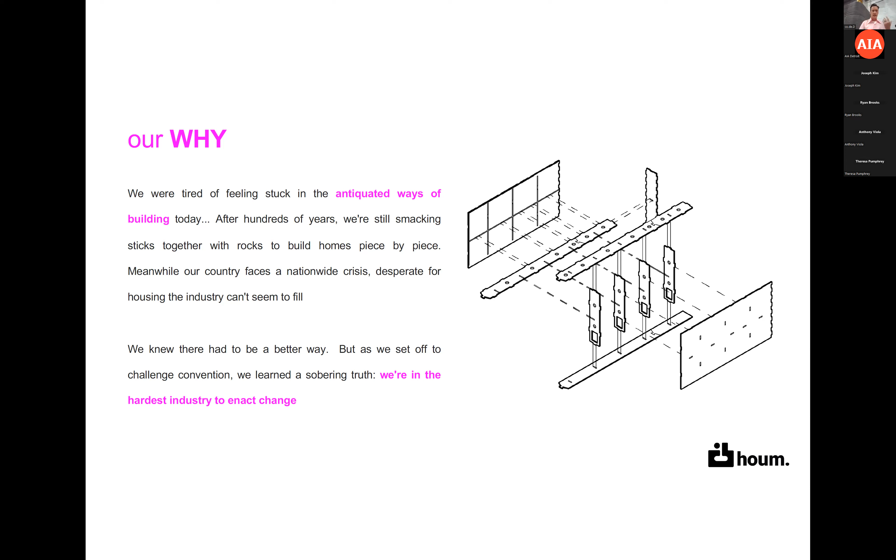I don't have the source to back that up, but I will say it's damned hard to change. And however you want to couch it, from skeptical contractors to risk-averse funders and banks to clients or tradespeople.

Who are operating on very tight budgets, don't have the kind of largesse to be able to suddenly take this flyer. All sorts of constraints.

And so years and years of trial and error, some of me working as a faculty member, doing research, doing prototypes, some of me working with Breck and our friends at 3 Squared, doing prototypes and taking on projects, paper projects.

We found what we believe to be a more scalable way. I'll let you know in about 9 months when our first project is complete, whether indeed it is, or I'll be up here in tears and you can console me and that'll be fine. We're taking this risk together. But our goal is to build smarter, greener, and more affordably.

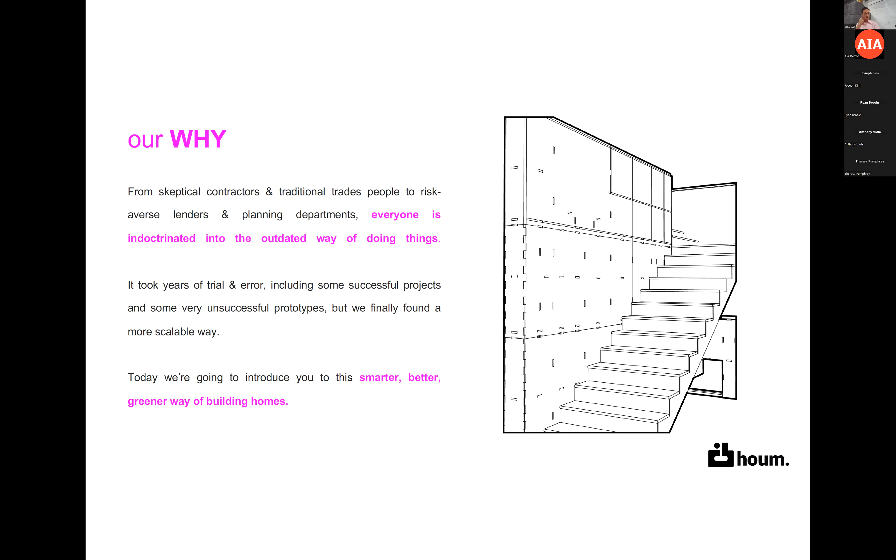So what we're looking at right now, and I'll explain the rationale for this in a second, is trying to harvest the intelligence and efficiency within industrial manufacturing, marry that with the promise of generative design, which we've already spoken a little bit about, and then marry that with the precision manifest in digital fabrication.

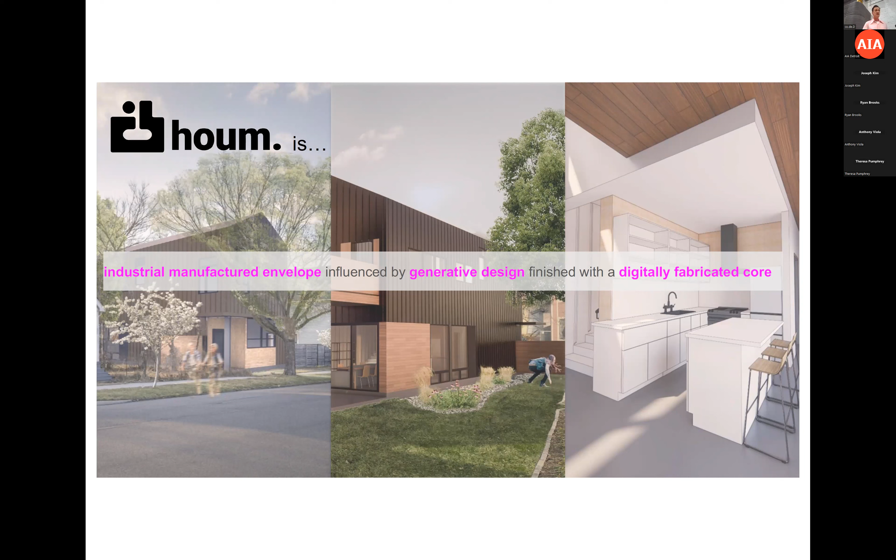Now, why industrial manufacturing is the first part. I wasn't interested in setting up a center or a lab where I was the architect and also happened to be the fabricator, the builder, the contractor, and the client, right? I was much more interested in just being an architect, and then finding ways to have people who fabricate and people who build do what they normally do, but in a way that disrupts the traditional patterns of the industry.

And so we started to look at other places where there's incredible efficiency and precision at a very large scale. Where does that exist within the building industry, right? There's a lot of different answers to that question.

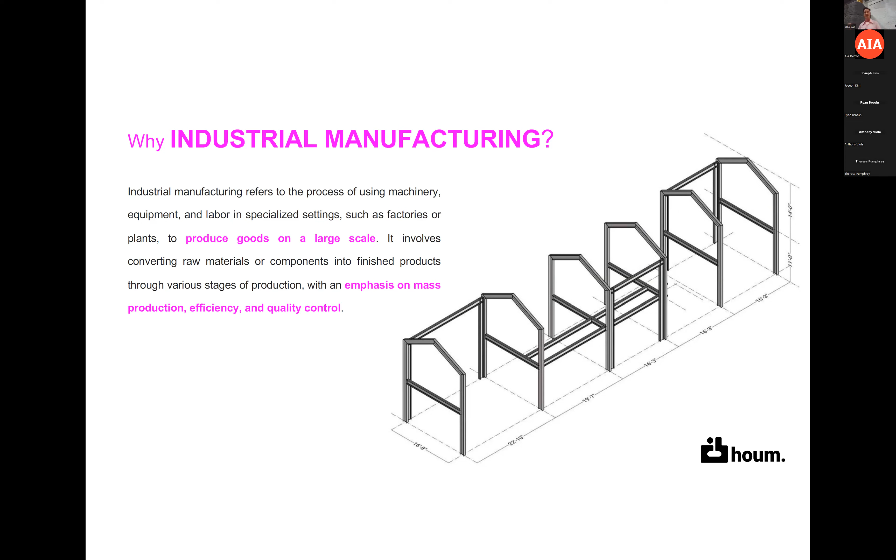I think not too many years down the road, the answer could be right behind me. Right now, where we are in terms of price point, some examples would be pre-engineered metal buildings. Another example would be SIP. Another example would be mass engineered timber.

I am fetishistically fascinated with those garages that you can order online for like $5,000. They blow my mind. They're cheap as all get out, and they make me vomit a little bit in my mouth. But if there's a way that we can harness that incredible precision and efficiency, and find a way to embed some greater intelligence in that, I think we'd get somewhere.

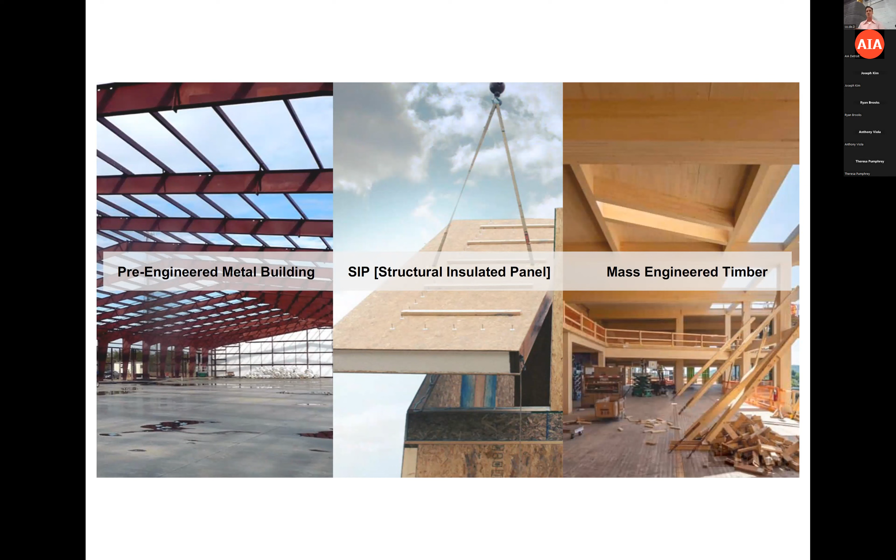On a per square foot basis, it's really hard to beat pre-engineered metal building in terms of just cladding a space and covering that space. Now, the problem obviously is that these forms of construction are sometimes very poorly detailed, sometimes massively out of scale, oftentimes really out of context within a residential neighborhood, and actually aren't incredibly kind to humans who want to live within them. So how do we deal with that?

Well, before we get there, the other thing is they're very much aligned with a distinct context. They operate well because it's a turn the crank sort of proposition. Keep doing it again and again and again. And you get smarter and faster and cheaper, smarter and faster and cheaper. That's how they got to be where they are, right?

So is there a way then that we can use generative design to begin to import greater intelligence to that envelope? And can we do it in such a way where we're not bloating the timeline or bloating the cost?

Now, I bring that up because there's a reason architects currently only design 2% of the houses in the United States: we're a luxury item. And we operate based on a patronage-based practice. Like we started designing for popes, and now we design for corporations. And we're very good at that.

But when you try to take that same exact set of tactics and apply them to a very different constituency, you can get into trouble, right? And so that's the reason 98% of the houses in this country are not touched by architects, even though we have a lot to offer that conversation.

We're expensive. So is there a way that generative technology can embed a little bit of the intelligence that we bring to every project into the specific context in which we're operating, without us completely remaining absent from it? Can it substitute for a portion of us so that we can infuse a little extra of us at the end and still allow the project to meet its cost and timeline obligations? That's the question we're trying to ask and answer.

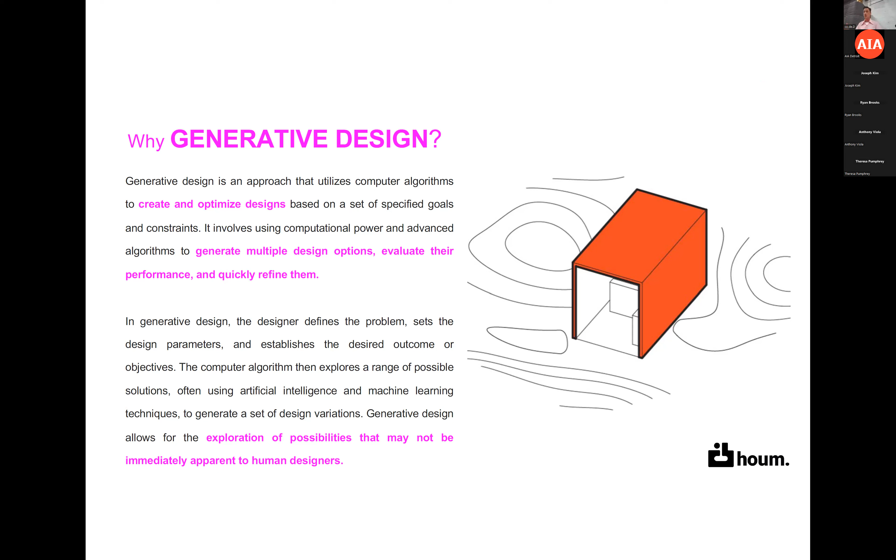And then digital fabrication. Well, I just spoke of the virtues of some of the dumbest, largest structures we've ever been able to produce. But there has to be some precision and intelligence within a house. There has to be a place for the hand, a place for the body, a place that we want to live and be and sit and rest.

There's also, within the house itself, not all walls are created equal. I love to do construction work—that's actually how I entered the field of architecture, fabricating furniture and construction work. In my work in housing, I can tell you that all walls are not created equal. There are some walls that are very simple to take down and erect, and others that are quite complicated. When you run into plumbing, structure, or electric, we all understand this.

And yet within many suburban houses, many houses, the 98%, let's call it that, those walls are distributed absolutely everywhere. So every wall is equally liable to have a bit of plumbing or electrical, or structure, or a bit of this. And so they're all more or less equally difficult, equally expensive.

But what if we looked at speculative office development, where the floor plate itself is largely absent much of anything aside from maybe perimeter columns, because all of the intense programmatic elements have been consolidated to the very center of the structure. That's where the vertical chases are, the elevator, the stairs, the restrooms—that's where everything is. All the rest of the floor plate is left really simple.

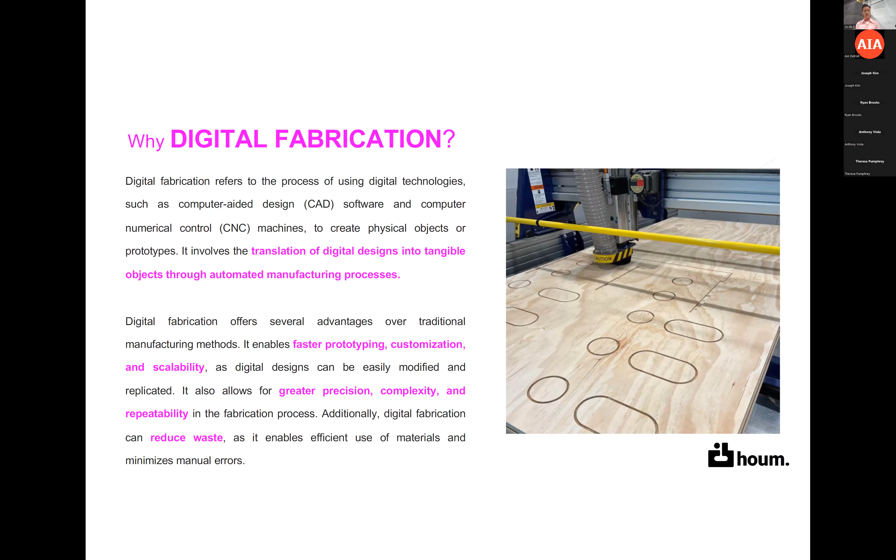We learn a lot actually at houm from the auto industry. We think the auto industry is quite sensible in many ways. One of the ways is that any car you look at is highly appointed in certain areas, but it's very predictable. The burled hardwood on a luxury automobile is always on the gear shift and always on the steering wheel—it's always where the hand comes in contact with the vehicle. The higher value materials are always where the eye comes in contact with the vehicle. The pressure's pulled everywhere else.

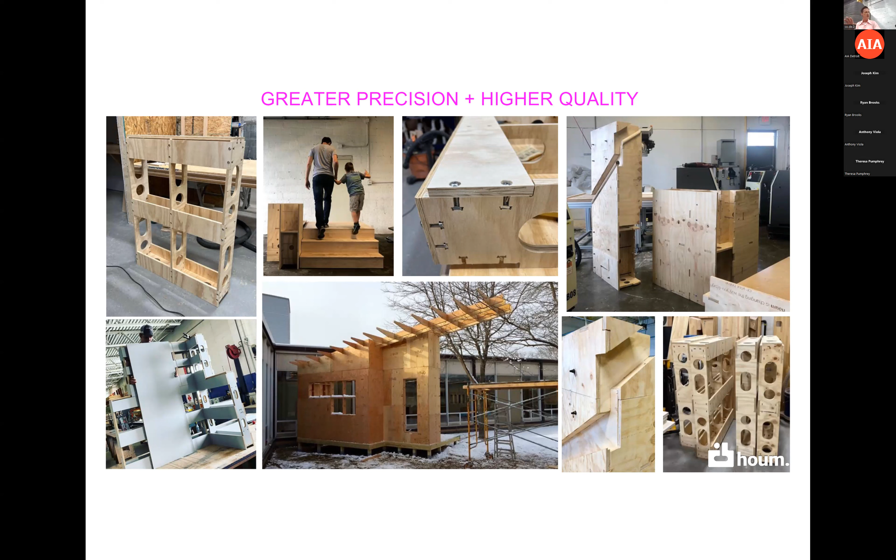Maybe we could design houses in that way. And that's what we were looking at, even within the industrial scale manufacturing you're talking about. Does the whole house have to be made of cedar to actually be homely and warm and resonate with people as a home ought to? Or maybe just the parts that are directly in contact with the human being as they occupy the thing? These are questions we ask and answer.

Also, this kind of overt expression of what we're after—how does the house itself, in its design, express the kind of values that I just shared with you? How do we allow the parts that are digitally fabricated to announce their presence within the design of the house, faithfully?

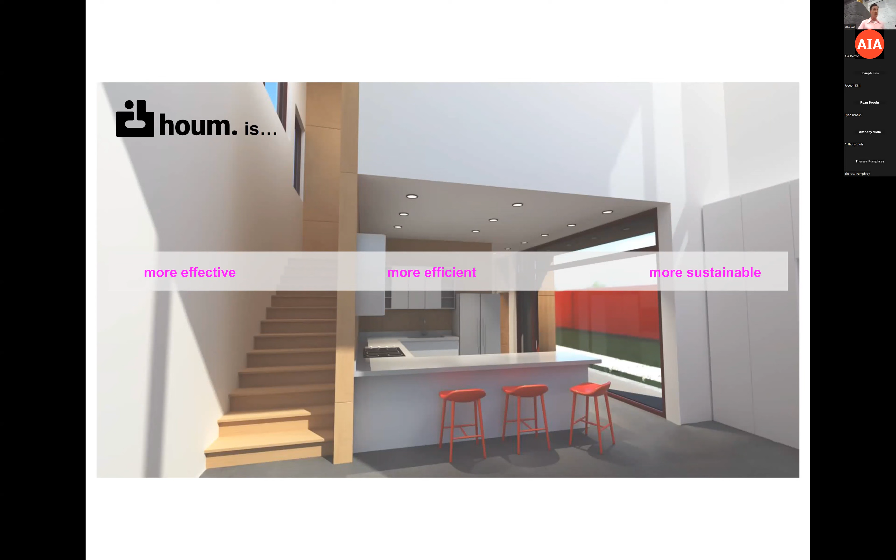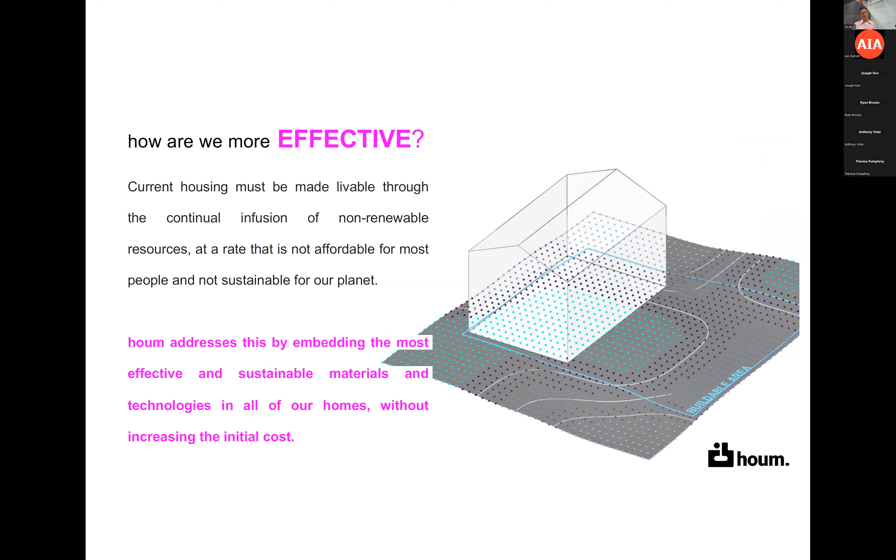So let me go into the whole objective, which obviously is to be more efficient. I've talked a little about that, and the efficiencies manifest in this submarine-style consolidation of the core elements. How can we be more effective? I know I'm running over time, so I'm going to jet through these. And then at the end of the day, how do we be more sustainable?

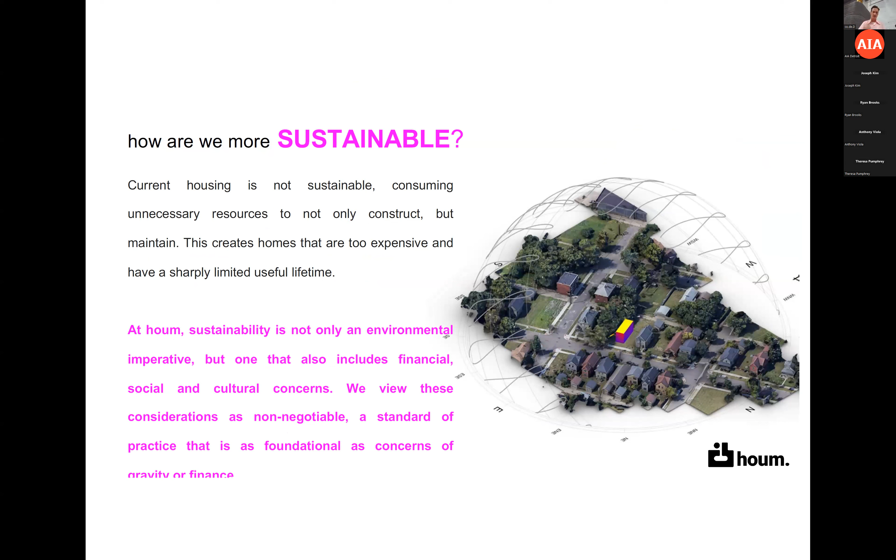How do we use digital tools to understand the impact and potential impact of the work? How do we use digital tools to understand exactly where to place openings so as to harness the potential embedded in the sun, as you can see within this study?

Currently, we're making projections—the first project will be done in April. You could come yell at me if I'm wrong. These are projections from bids submitted by contractors.

Currently, we're operating at under $200 a square foot as a finished build within Detroit, which those of you that work in Detroit know is significant for the quality of output we're talking about. That's a significant savings. The $250 a square foot is for a fairly low polish within a house.

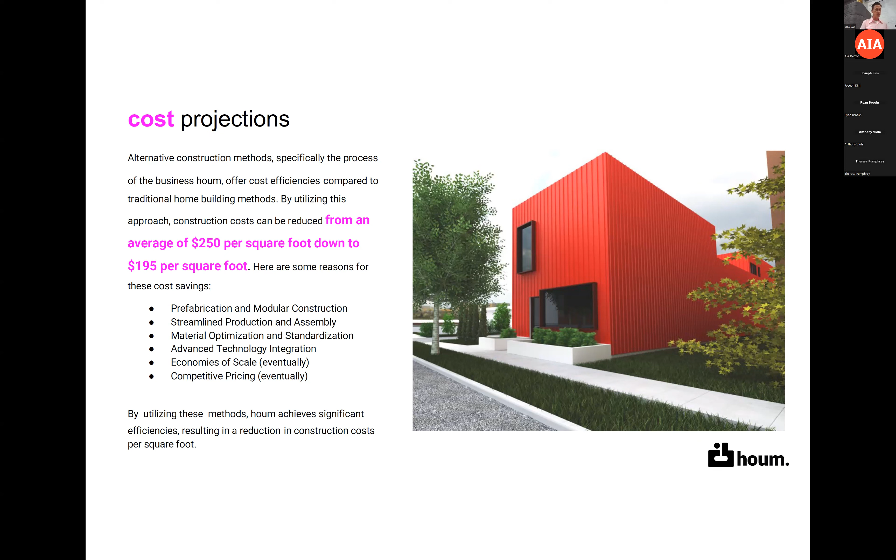So for us to get under $200 a square foot, we're outperforming the market by a factor of 33% on comparable quality. In terms of timeline, we are also anticipating cutting the normal 9 months down to 6 months. I can't do the math right now—nothing has happened yet on site, so our time hasn't started yet.

Mainly because everyone's so damn busy, they don't want to return our calls. We keep calling them though. We'll get there, right, Breck? The other founder's right there. I'm doing great—you can just stand back there and wave.

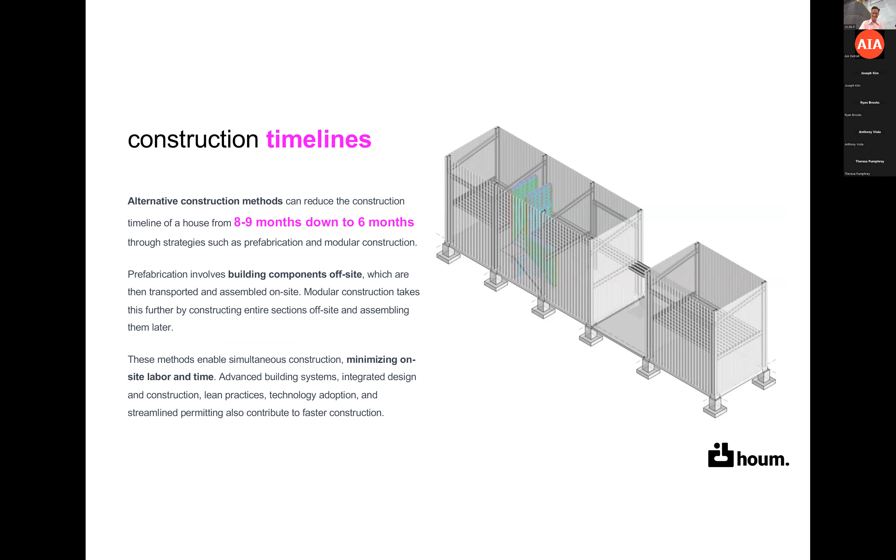So a couple houses we'll talk about, a couple paper projects, and then a project that soon won't be paper. One of the paper projects I want to talk about, we named Martin. It's on MLK—figured it's a nice little homage.

Right there behind the dog care center, K9 to 5 on Cass. Some of you probably know that place. The lovely owners decided that the property behind that space could be a live-work arrangement. So we designed a front building where they could use part of it as an office, rent it out, and then the back part, which could be a house, faces the backyard.

One of the assets within industrial scale manufacturing, specifically the metal building, is that the structure operates fundamentally differently than light frame construction. So all of a sudden, the way you can articulate windows changes fairly dramatically. When we're talking about how do we create an aesthetic that's an honest expression of the assets we've found within this different process, those large windows—fewer, larger windows—is one of those expressions within the work.

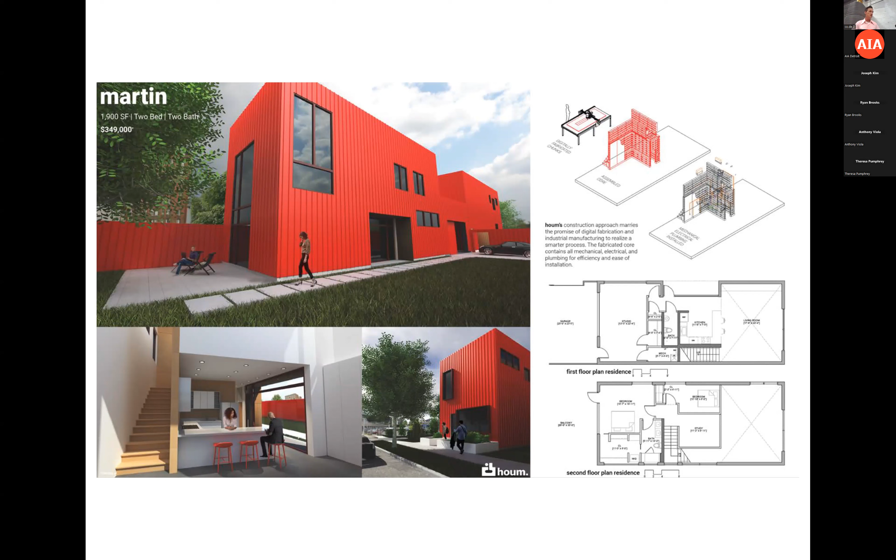It's also an expression of the interior, where once again we have the freedom of having 30-foot clear spaces like we sit in right now, maybe not quite this large. These celebratory, historically called great rooms, we can realize at a fraction of the cost. Both of the large windows you see here are actually bringing light into such a great room, 30 feet tall or something obnoxiously tall.

And there you see it sitting on the main street, fronting with the commercial side of things, and that's the entry side. The home itself would sit at the back. There's an elevated porchway, and in the back there's a garage bridging the two.

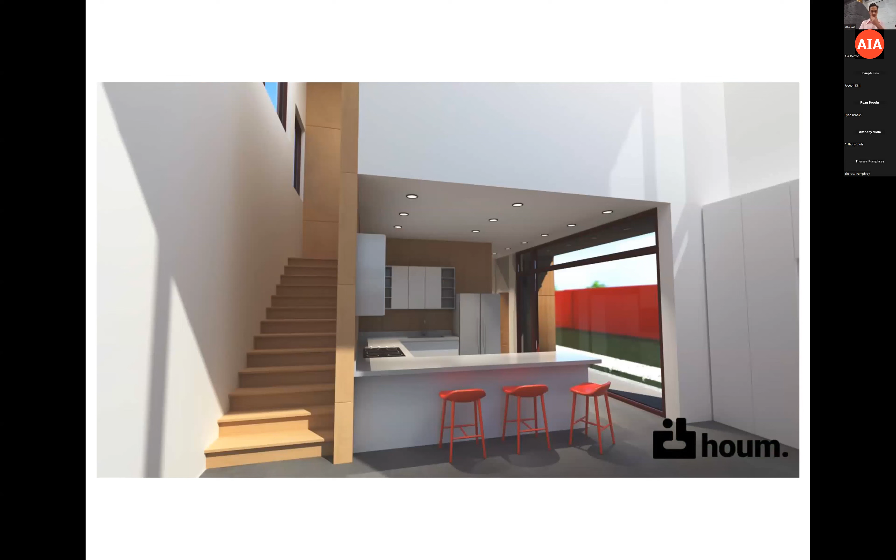An interior shot. We also looked at going very, very tiny. This was done—I helped my friend Chris over there, right? Back when he was a student, we were looking at, all right, what happens if we go really tiny? How tiny can we get, how quick can we put this thing out, and how cheaply can it be done?

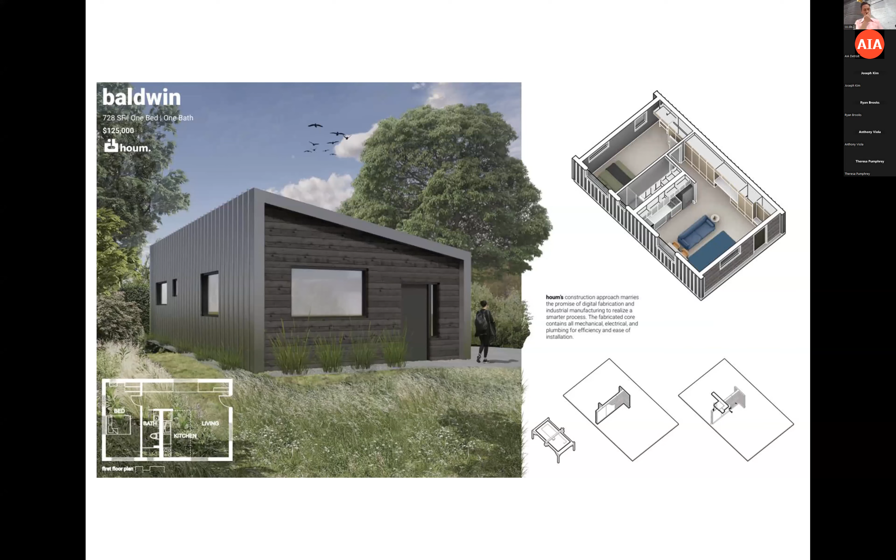And how much energy can it harness? And can it really fulfill the obligations of a house? Again, paper projects, thought projects, until we got here. So this is a project, Breck, co-founder over there, also owner of this house, hopefully. You're the owner, right? Checks are still being signed. Stuff's being, all right, will be.

Here in the neighborhood, 1,700 square feet, including a back auxiliary building with a bridge connecting the two. Tight lot, very tight lot. I think all told, the building itself is 15 feet wide. 18, oh my God, 15 interior, maybe I was thinking, I don't know. And just completely wrong.

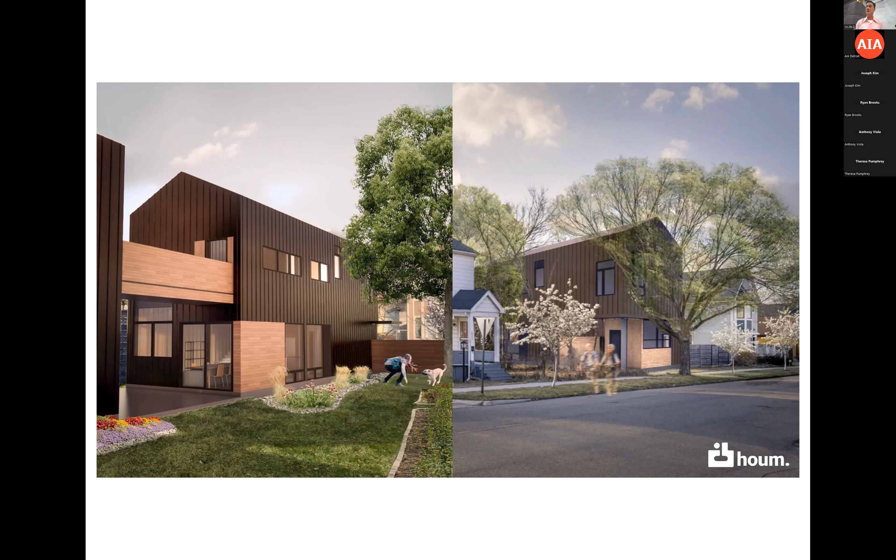Again, you see this tightly wound. So if I were to show you the plan, which I probably in retrospect should have, I could have circled all the complex ingredients of the house, and it would have fit in a very small portion of the house, freeing the rest of the house up to be open, light filled, and executed in a much less expensive manner. You can also see this kind of wrap of wood and cedar at the moments where the human comes in contact, and then kind of releasing that and allowing the house to use industrially produced scalable materials.

And at the end of the day, that's what we're interested in, the kind of scalability of our work. We from the get have never been interested in the kind of one-off proposition. And so on the first couple of projects, we are functioning as architects, as I said. But our ambition is always to build around, what is House 300? How does this feed House 300?

Because when you're looking at like Ford and the F-150, right? They generate so many losers before they get to the winner. Each one of it tests a different component and fails in that test. And they don't sell those, they can't sell those. But eventually they get it right, and then they produce it at a massive scale. And that's what we're interested in doing.

I think we're logical enough to know that we as architects have not an infinite knowledge base, but there are incredibly smart people out there. And something that architects can do really well is dialogue. The best of us can dialogue and listen. And I think the people in this room do a great job of that. And that's why I'm thrilled to be here representing houm with a great group back there and a great group here. So thank you.